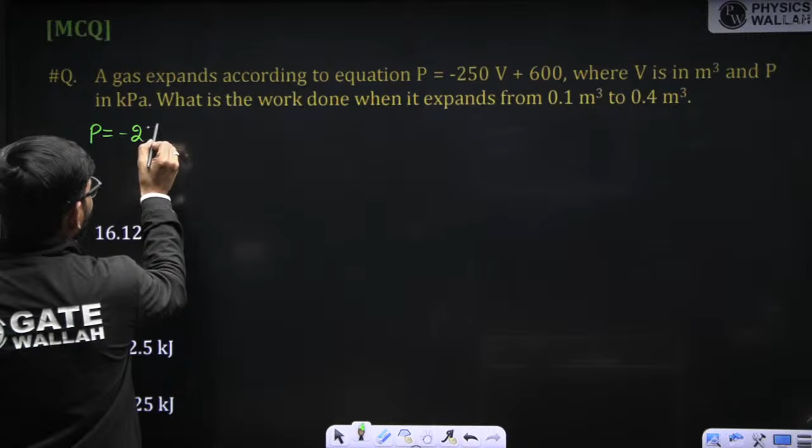The relation between pressure and volume is given: P is equal to minus 250V plus 600. This is the pressure and volume relation, where volume is in meter cube and pressure is in kilopascal. What is the work done if it expands from 0.1 meter cube to 0.4 meter cube?

0.1 meter cube to 0.4. Actually two methods are there to solve this, right? One with the help of formula. So what is the formula to get the work? W is equal to integration 1 to 2 of PdV. Yesterday we discussed this, right? This is a closed system displacement work.

Now in this one we can write 1 to 2 of minus 250V plus 600 into dV. Now if I integrate this, you will get minus 250 into (V2 square minus V1 square by 2) plus 600 into (V2 minus V1). Very simple, just integrate and put the value, you will get the answer easily.

So here I can write 250 divided by 2. How much will it come? 125. So minus 125 V2 square. What is the final volume? Final volume is 0.4. So 0.4 square minus 0.1 square.

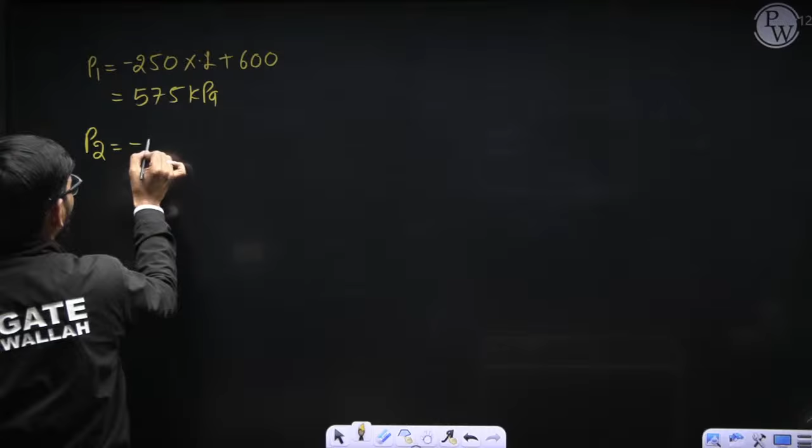So minus 250 into 0.4, this value will come 500 kilopascal. Now if I draw here the P1V1 and P2V2 points.

P1 value is 575 and V1 value is 0.1, so this is basically one point: here it is 575 kilopascal, this value is 0.1. Another point is somewhere here where pressure is reduced to 500 kilopascal and volume becomes 0.4. The pressure and volume relation is given.

Like in a straight line. It is given as a straight line because P equals A plus, like you can say Y equals mx plus C kind of equation, correct? So this is basically a straight line variation.

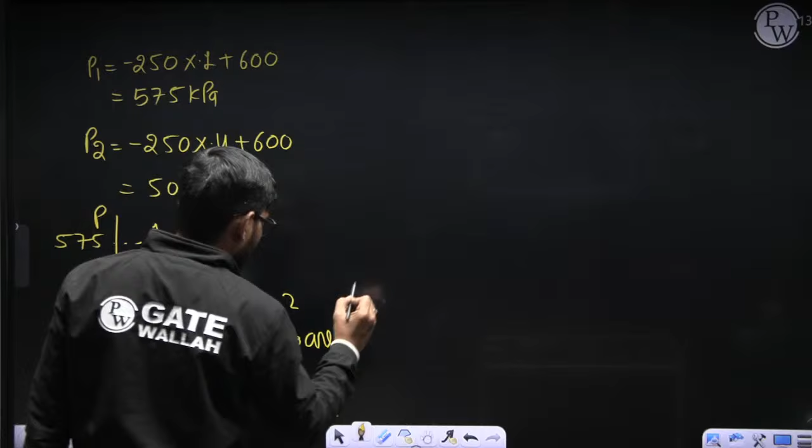Pressure and volume relation is linear. Now the work is given by the area under the curve, right? So this area, W1 to 2 can be written as area under the line. So this value will come half.

Sum of parallel lines means 575 plus 500, into this distance means 0.4 minus 0.1. This is another method, right? So from here you will get 575 plus 500 divided by 2 into 0.3, right? So you will get 161.25 kilojoule. Clear?

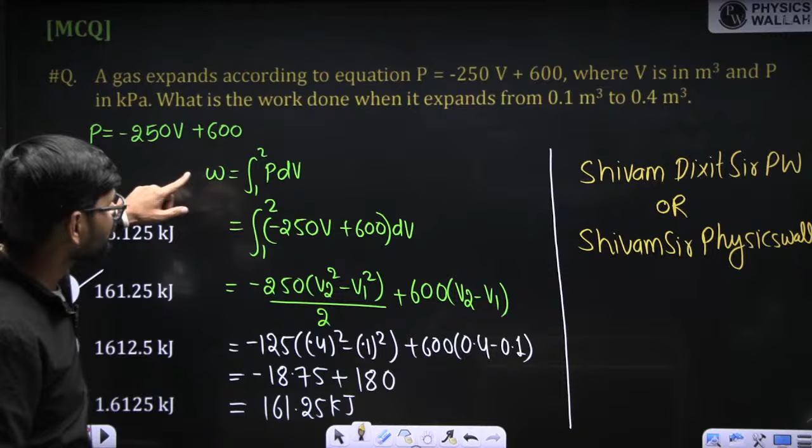Please listen here. You can solve the problem. Yesterday also I clearly mentioned that whether you can solve the problem with the help of formula or you can solve the problem with the help of area under the curve, you will get the same answer.

Okay, let's solve the next problem.

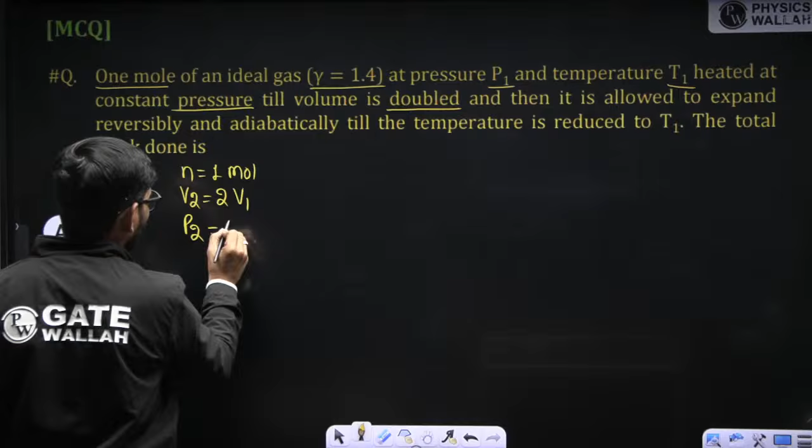Then it is allowed to expand reversible adiabatic till the temperature reduced to T1. Temperature is already T1, na? 1 mole of an ideal gas, 1.4, at pressure P1 and temperature T1, heated at constant pressure.

Okay, first we are heating at constant pressure. Acha, okay, then we are expanding. Okay fine. So basically here you can say 1 to 2 is constant pressure. Okay, I'll draw the diagram itself. PV diagram I'm going to draw.

So the first process is given that it is constant pressure heating. This is, let's say this is point 1, constant pressure heating. Then isothermal, then allowed to expand reversible adiabatic. This is reversible adiabatic. So this value is PV to the power gamma equals constant.

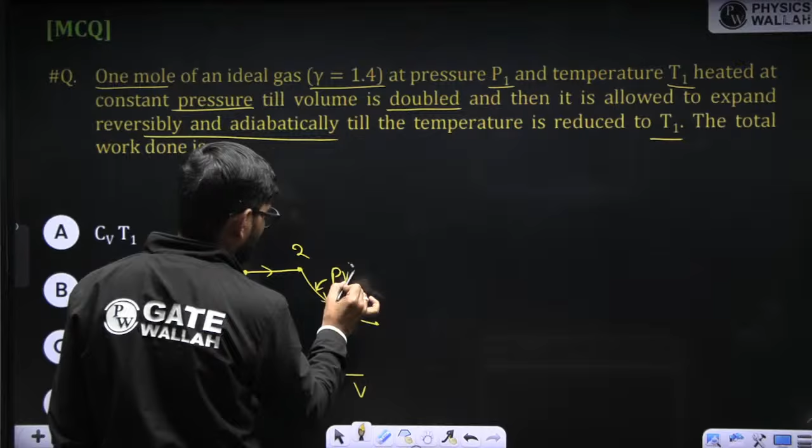Now in such a way that T3 equals T1, my dear student friends. The total work done you need to calculate. What is the total work done? So to find out total work done, please listen here carefully, right? So W total equals W1 to 2 plus W2 to 3.

Now what is W1 to 2? Please listen here carefully, this is a very good question, I would say. Why? Because here some people will get confused. They will think that, sir, final temperature is T1, so this point should be here. No, right? There will be an isothermal line like this, right? Isothermal line will be like this, right?

You are getting my point or not, right? So basically here only 2 processes are there. Point 3 temperature and point 1 temperature is same, correct? Now in this case W1 to 2 value will come P1, or we can say P1 also, right?

V2 minus V1, P1 into V2 minus V1. This is basically work done during the 1 to 2 process, correct? Then plus P2 V2 minus P3 V3 divided by gamma minus 1. Any problem here? No problem at all.

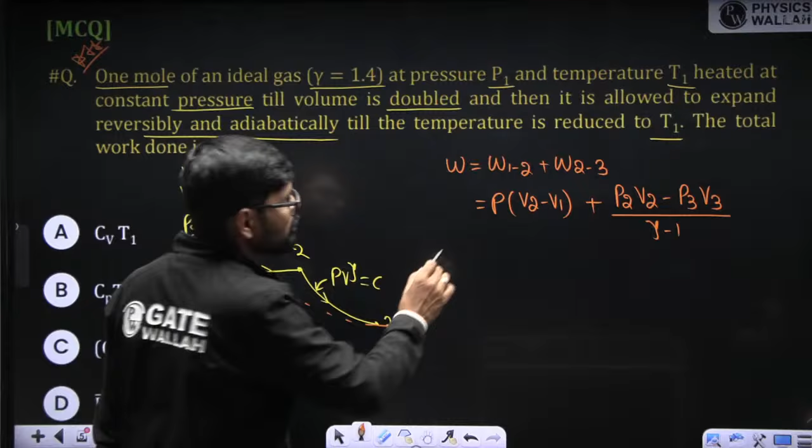Please listen here carefully. Now the answer is given in terms of temperature, so it is better to convert all these things into the form of temperature. Now here P1 is equal to P2 is equal to P, right? So you can write this like N R bar T. P2 V2, here you can write like this, P2 V2.

So P2 V2 value will come how much? Okay, I will write here P2 V2. Now you may ask, sir, why are you writing P2 V2? I am writing P2 V2 because P1 is equal to P2 is equal to P, correct? So P2 V2 minus P1 V1, here I am writing this P as P2, and here as P1, plus

P2 V2 minus P3 V3 divided by gamma minus 1. Gamma minus 1. Now put the value.

So this value will come how much? This value P2 V2 is equal to MR T2, or NR bar T, right? NR bar T2 minus NR bar T1, right? Plus NR bar T2 minus NR bar T3.

T3 is equal to T1 basically, right? T3 is equal to T1, gamma 1.4 minus. Yes.

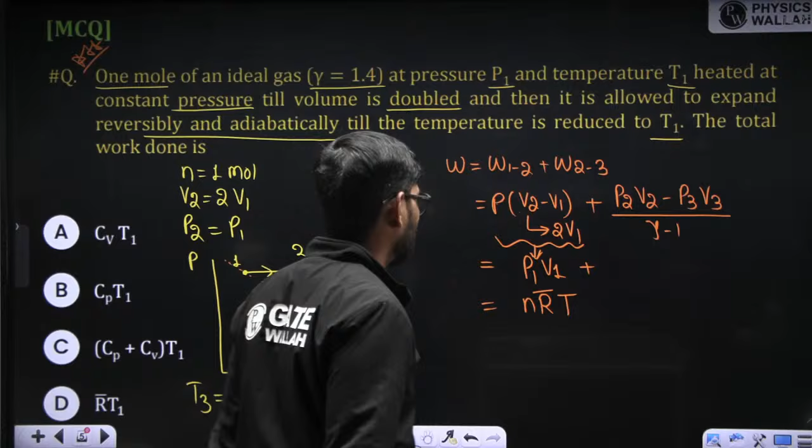And this value also can be written like this, now V2 and V3 value. Now V2 value is 2 times of V1. V2 value is 2 times of V1. This here also if you require you can write, or you can mention the MR temperature term also, no problem. Here you can write 2 times of V1 also as per the requirement.

With the help of first law also you can solve correct, TPM. That can be written as, because dq is equal to du, that is also correct. There is one another option.

There is another option, if this seems lengthy, then w is equal to, sorry, wait, I will write here w1 to 2. Easy way I am telling you. First you calculate w1 to 2. So that value will come P into V2 minus V1, because some people may confuse there.

So 2 times of V1 minus V1. So here it will come P into V1, or P1 V1. That can be written as RT1, no problem.

Now when you calculate 2 to 3, you have one option that you can apply first law, right? You can apply first law here. First law is dq 2 to 3 is equal to du 2 to 3 plus dw 2 to 3.

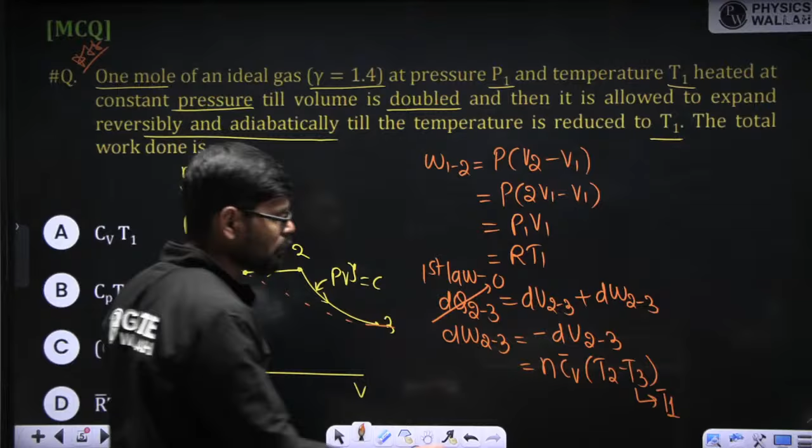Now t3 value is given as t1, right? t2 value is given, t3 value is given as t1. Only you have to replace the t2 value. Only you have to replace the value of t2.

How you will replace? For process 1 to 2, pressure is constant. So T2 by T1 is equal to V2 by V1.

So this is 2 times of V1 by V1. So this will be cancelled out. So T2 value will come 2 times of T1 also. So this can be written as 2 times of T1.

So this value will come how much? CV bar T1. CV bar T1 bar T1. In our notation bar is there, right?

Now we need to calculate total W. So W1 to 2 plus W2 to 3. This will be quite easy. Even you can put with the formula, and then formula you can convert in form of T.

Then R can be written as R. CV can be written as CP minus CV can be written as R. In that way also we can solve, no problem. R bar T1 plus CV T1, right?

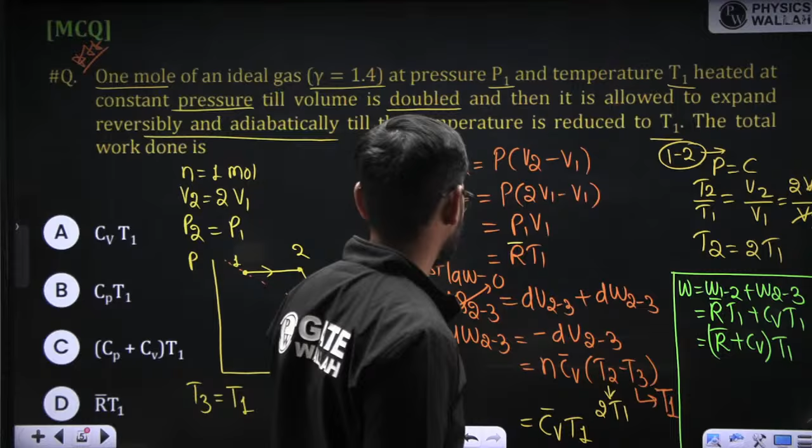So Cp minus Cv. Okay, so we know that here I can write Cp minus Cv bar is R bar. So Cp bar is equal to R bar plus Cv bar. So this can be written as Cp bar into T1.

Actually, this is written Cp bar only, right? Because yesterday also I clarified that whatever notation we are using, that does not mean that IIT people are also using the same notation. There is no guarantee on that. So don't be confused here.

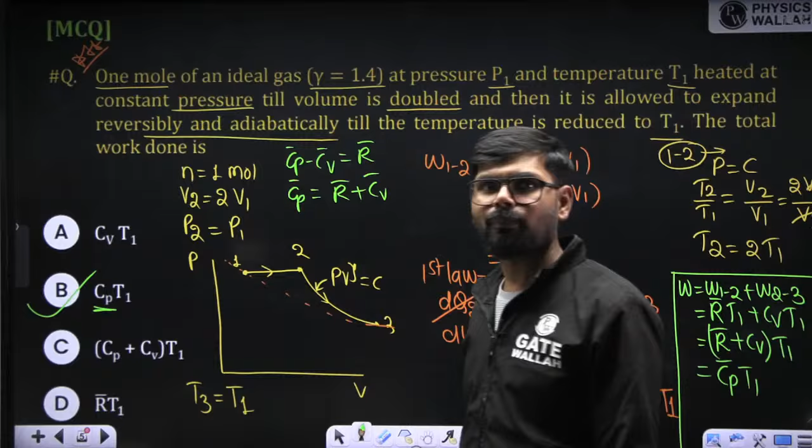See, Cp bar we are using generally when the values are given per mole. When the values are given per mole, then we are using Cp bar, right? Sorry, bar. When values are given per unit mass, then we are using direct C or whatever it may be.

Okay, next question. Everyone try to solve this problem. Yes, this is molar form of Cv, correct?

This is not a cycle problem.

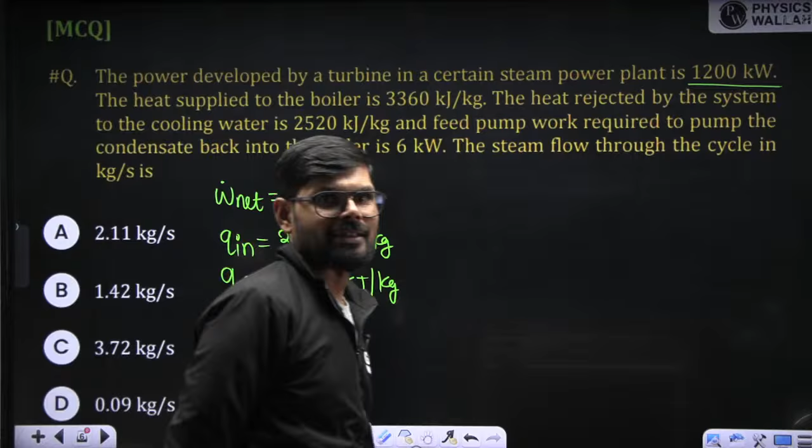Solve fast. Very good, TPM. Which option is correct? It is a very simple first law problem, bhaiya. It is a first law problem only.

It is a first law problem only, beta. This turbine power, this is WT dot. WT dot value is here. Now, so it is basically operating on a cycle. So for a cycle, we can write sigma Q is equal to sigma W.

Now, heat is added, right? So we can write Q in dot, everything I am writing in rate form. Q in dot minus QR dot is equal to WT dot minus W pump dot. Now these values are given in kilojoule per kg, so you can write M dot, M dot will take outside. So this value will come: Q in minus QR is equal to WT value 1200 minus WP value, how much? 6. So M dot value you can calculate.

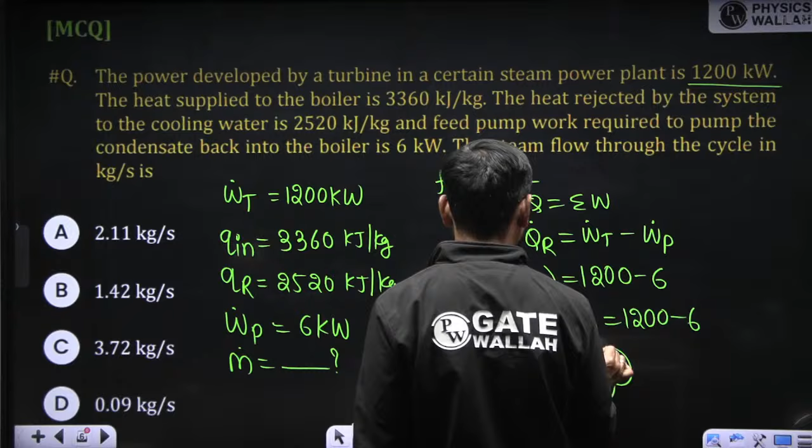Q in value is how much? 3360 minus QR value is 2520 is equal to 1200 minus 6. M dot value you can calculate, how much are you getting? 1.42 kg per second. 1.42 kg per second, right?

So shall we move to the next problem? We have 1.42. Okay, solve this problem. This is a very good problem, and even we have did in the class also, if you recall. We have already solved this problem in the class also.

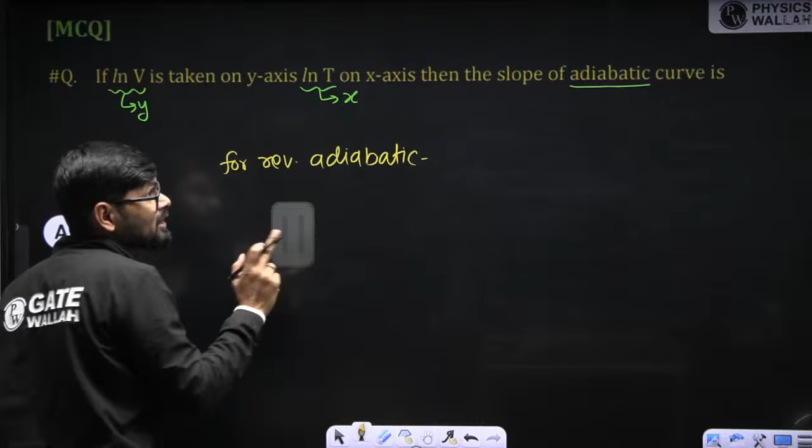And we have to find out for adiabatic curve. Now, for adiabatic curve, what is the equation, beta? For reversible adiabatic, PV to the power, or use T and V relation. Yesterday I gave 3 relations, if you recall. So TV to the power gamma minus 1 is equal to constant.

Now take log both the sides. Right? So here you will get ln TV to the power gamma minus 1 is equal to ln of constant. Now here, ln A into B is ln A plus ln B. So ln T plus ln V to the power gamma minus 1 is equal to ln C.

Now this can be written using log properties, which you already know. So gamma minus 1 will come to this side: ln V is equal to ln C. Basically, we want to write it in terms of y is equal to mx plus c. So y means ln V, I want it on this side only. So I can write: gamma minus 1 ln V is equal to minus ln T plus ln C.

Right? Now what I am going to do is divide by gamma minus 1. So ln V is equal to minus 1 by gamma minus 1 ln T. Then it will become some other constant, let's say C. ln C by gamma minus 1 is also a constant. That's it, very simple. So this is C only.

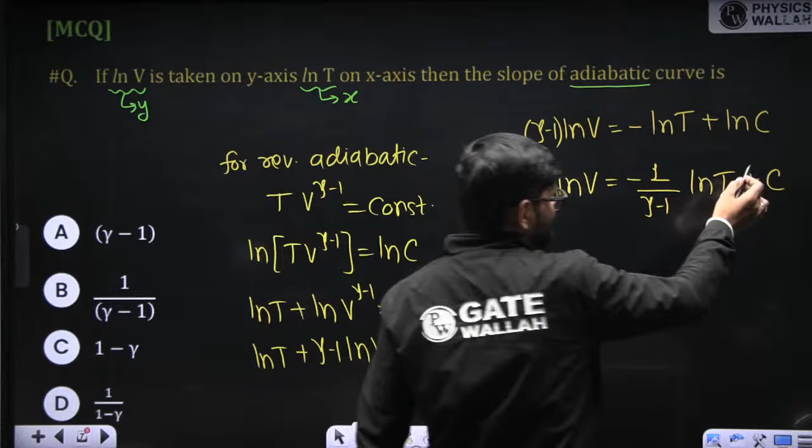Now this can be written as ln V is equal to 1 by 1 minus gamma, ln T, plus C. I already told you this is basically represented as Y, and this is represented as X. So it is Y is equal to, compare with Y is equal to mx plus c. So m value will come how much? 1 by 1 minus gamma. This is a slope. Solve.

Solve fast, Babu, fast. Very good, Adarsh Singh, Rosni, Vishal, Vibhu, Mukul Srivastav, Mac. Very good. All the superstars are here.

Shall we move on to the next problem? Okay, let's move to the next problem. Everyone please solve this problem here.

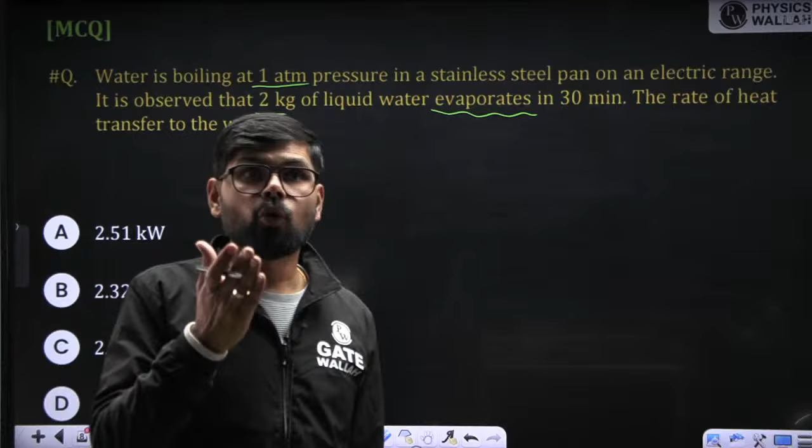Now it is given that water is boiled at 1 atmospheric pressure in a stainless steel pan with an electric range, meaning an electric heater kind of setup. It is observed that 2 kg of liquid evaporates. Please listen and try to understand: when they say evaporation, only the heat required for evaporation needs to be considered.

In 30 minutes, we need the rate of heat transfer. Please try to understand how much amount of heat is required to evaporate 2 kg of liquid.

So Q required is basically M into L. This is the total heat required. Total heat required is M into L. Like if you want to evaporate 2 kg of water, then M into L.

Now the L value, yesterday I gave you 2256. You need not remember all the values of latent heat, since latent heat values vary with respect to pressure as well as temperature. So here we can write 2256 approximately. This is the latent heat at 1 atmospheric pressure.

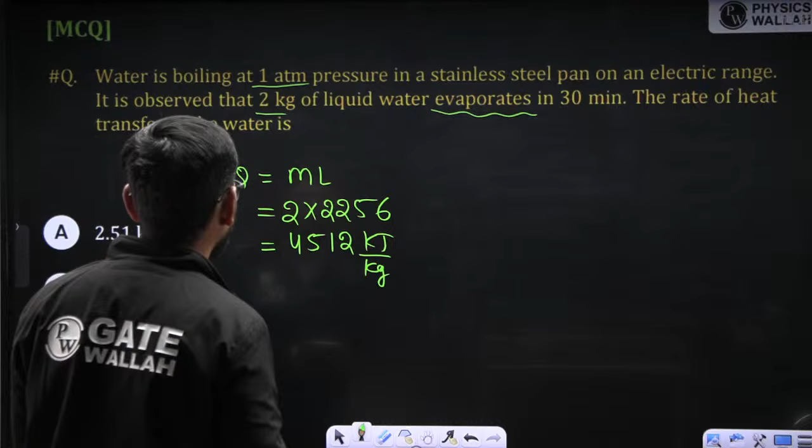So this value will come how much? 2256 into 2, so this value will come 4512 kilojoule.

Now, but actually we are not interested in Q, we are interested in Q dot. So Q dot value will come how much? Q dot value will come Q by time, my dear student friends. So this value will come 4512 divided by time.

Time is 30 minutes, 30 into 60, we are writing it in seconds. So this is divided by 30 into 60. So this value will come 2.51 kilowatt.

Very simple problem, very simple but highly conceptual. Very simple and highly conceptual problems. Very good.

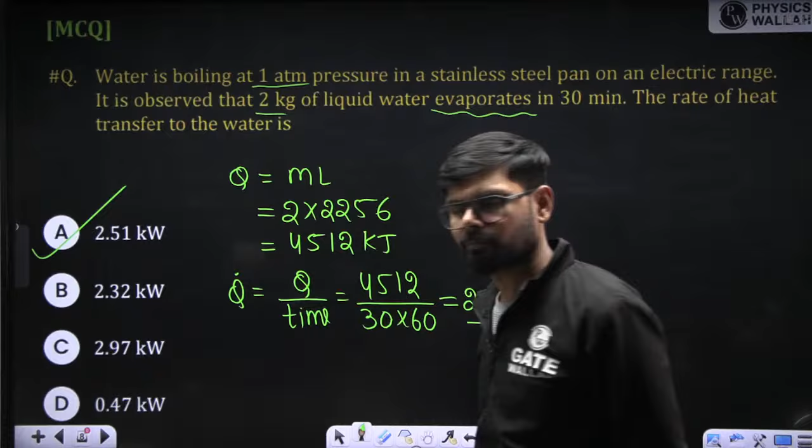Shall we move on to the next problem? Sure, okay. Solve this problem. Everyone try to solve this problem.

Here it is given that a Carnot engine having efficiency 0.5 is driving a refrigerator which has a COP of 5. So it is like we have one heat engine that is taking Q1 amount of heat and rejecting Q2 amount of heat at lower temperature. Then whatever work it is producing, that work is going into a refrigerator. That refrigerator, let's say, is taking heat from a lower temperature, that is Q3, and rejecting Q4 to the higher temperature. This kind of system is there.

Now here two conditions are basically given. In such type of problem, I have already told you, you have to write all Q in terms of Q1. Basically what they are asking is the ratio of the heat rejected to the ambient to the energy absorbed.

So ambient, how much heat? See, this is also ambient, this is also ambient. Let's say this is taking heat at a T1 temperature, but it is rejecting at atmospheric temperature, T ambient. It is taking heat from the place where we have to cool, but this we are also rejecting to T naught. I will write T naught here, and T naught here as well.

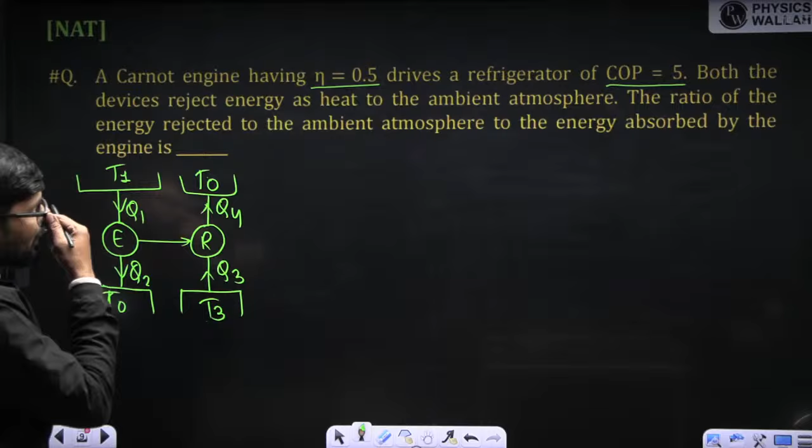So basically what we need to find out is Q4 plus Q2 by Q1. This is basically what we need to find out: the energy rejected to ambient divided by the energy absorbed.

Clear? So how we will proceed? I told you earlier also, in such type of problems, you only have to focus on how we can convert all Q in terms of Q1. For example, the efficiency given is 0.5, that is 1 minus Q2 by Q1. So Q2 value will be 0.5 Q1.

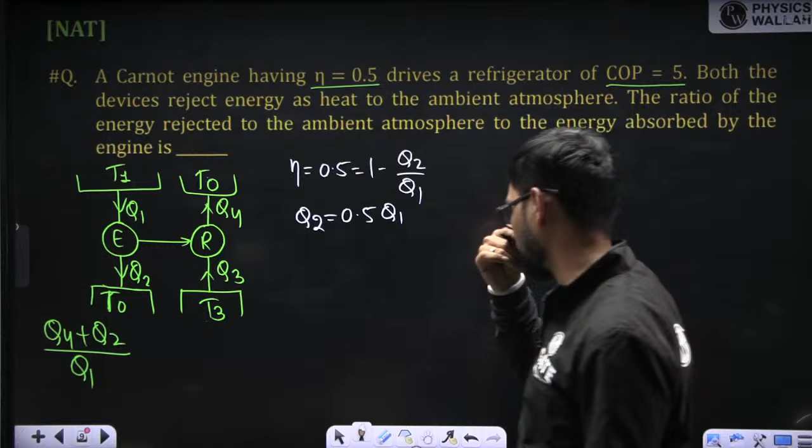Now come to the other case, that is COP which is also given. Now what is the COP of a refrigerator? COP of a refrigerator is given as 5.

That is nothing but equals to Q3 by Q4 minus Q3. Now one more thing I would like to share here: Q4 minus Q3 can be written as Q1 minus Q2, because whatever work is produced by the engine, the same work is going to be consumed by the refrigerator.

So now I can write, 5 is equal to Q3 by Q1 minus Q2. So Q1 is Q1, Q2 is 0.5 Q1, so this value will come 0.5. So Q3 value will come 2.5 Q1.

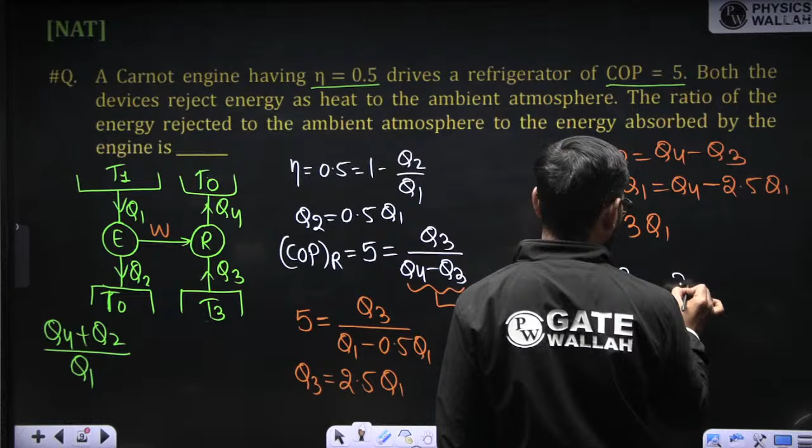Now we have to find out Q4 value. So Q1 minus Q2 is equal to Q4 minus Q3. So Q1 minus 0.5 Q1 is equal to Q4 minus 2.5 Q1. So Q4 value will come 3 Q1. Now we have to find out Q4 plus Q2 by Q1. What is Q4? 3 Q1 plus 0.5 Q1, divided by Q1. This value will come 3.5. This is the answer. These are very, very good problems.

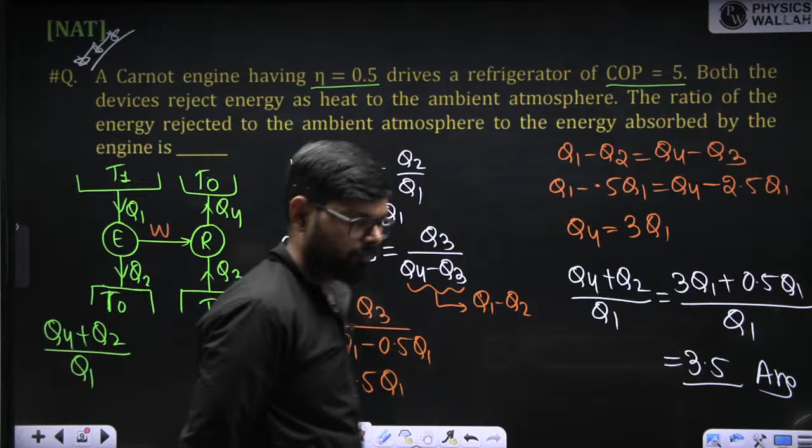These are very, very good problems. In this session, you can see that these questions are very good, right? There are very good chances that these type of questions may ask in the exam. So Super 20 series is going on. We are solving the problems. So everyone come fast and we'll continue. Very good, very good, very good. Next problem, solve next problem.

Similar kind of problem, because engine is driving the refrigerator. Sir, why are you taking same work in engine and refrigerator? Yes, TPM is giving the correct answer, because the engine is going to drive the refrigerator, so whatever work is produced by the engine, that is consumed by the refrigerator. Very simple.

The second law efficiency. What is second law efficiency? The second law efficiency is basically actual efficiency by reversible efficiency. And this is second law efficiency given as 0.6, that equals actual efficiency 0.36. Now what is reversible efficiency? 1 minus TL by TH.

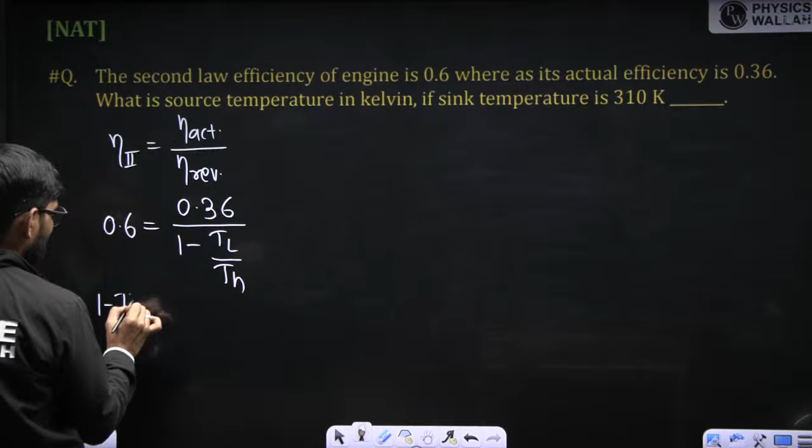So you can write 1 minus TL by TH. TL by TH value is how much? TL value is given as 310 Kelvin. So what is the value of TH? You need to find out TH value, solve fast. So I can write 0.36 divided by 0.6 equals 1 minus TL by TH. This will go this side, this will go this side. So 1 minus 3 by 5. TL by TH value is 2 by 5.

So 310 divided by... 775. Yes, 775 Kelvin. Very good.

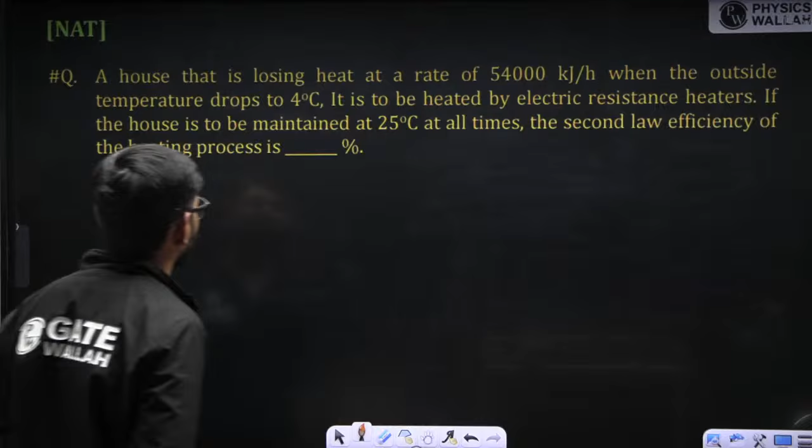Now, in this problem, if you see, a house is losing heat at the rate of 54,000 when outside temperature drops to 4 degrees centigrade. It is heated by an electric resistance heater if the house is maintained at 25 degree temperature all the time. The second law efficiency you need to find out. First try to find out how much reversible work input is required.

See, suppose you have one house, TPM, and it is maintained at 25 degrees centigrade, but outside temperature is 4 degrees. That's why it is rejecting heat at the rate of 54,000 kilojoule per hour. Write in kilojoule only, no problem, kilojoule per hour only, no problem. So if you want to maintain this house at the same temperature, the same amount of heat you need to supply.

Same amount of heat you need to supply to maintain this temperature. Otherwise you will not be able to maintain it. If you supply less heat, the temperature will drop. If you supply more heat, the temperature will increase. If you want to maintain the same temperature, exactly the same amount of heat you need to supply.

Assume that I am supplying this with a heat pump. Sir, why are you considering a heat pump? Because I want to calculate W reversible. Very good. So this is taking heat from 4 degrees centigrade and W reversible work. Just assume that you have a reversible heat pump and you are using it like this.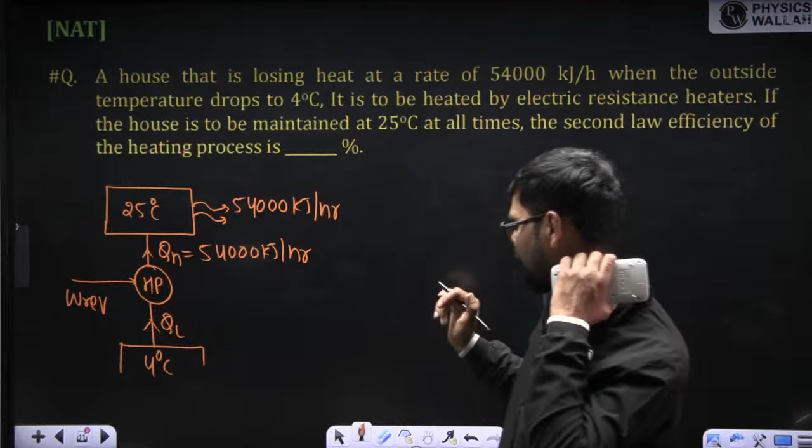So what is COP of this heat pump? COP of this heat pump is equal to TH by TH minus TL. TH means 273 plus 25, that is 298, divided by 298 minus 4.

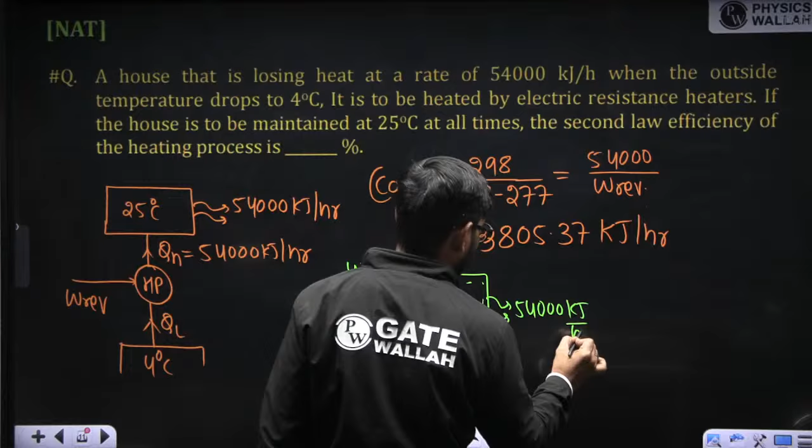So sigma q is equal to sigma w, or dq is equal to du plus dw. Du value will be 0 because temperature is maintained constant. So W actual value will come 54,000 kilojoule per hour. So actually you need to supply this much amount of heat, whereas reversibly you can supply this much amount of heat.

So what is the correct answer?

Now we have to find out the second law efficiency. Second law efficiency is W reversible by W actual. So this value will come to 3805.37 divided by 54,000, which gives 0.0705, or you can say 7.05%.

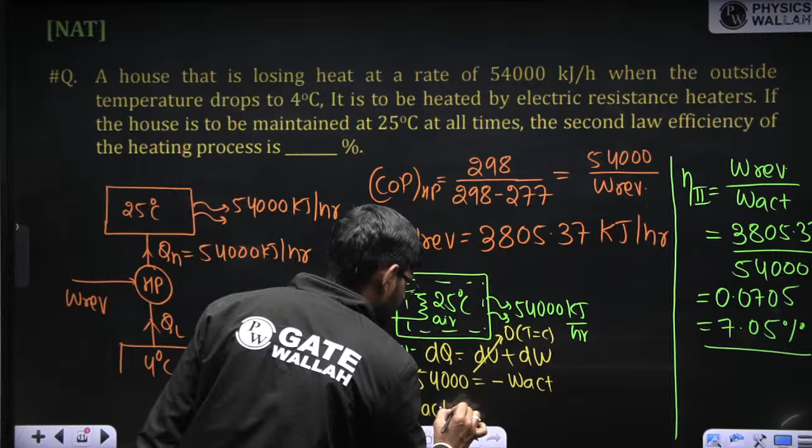So W actual one more time, please try to understand. Here basically what we have, air is there, so in this case I can apply first law: dq is equal to du plus dw. Now du value will be 0 because temperature is constant, 25 degrees is maintained. That's why du value becomes 0. dq value is minus 54,000, since it is rejecting, and W value is minus W actual. So W actual value will come to 54,000 kilojoule per hour. Is it clear?

Who is asking this question? Raju Mahanto. Raju Mahanto, is it clear?

Actually, I am not able to see the comment. The comment I am able to answer, I am able to see, but the name I cannot see in the TV because the TV is a little bit far away. I have to zoom it somehow.

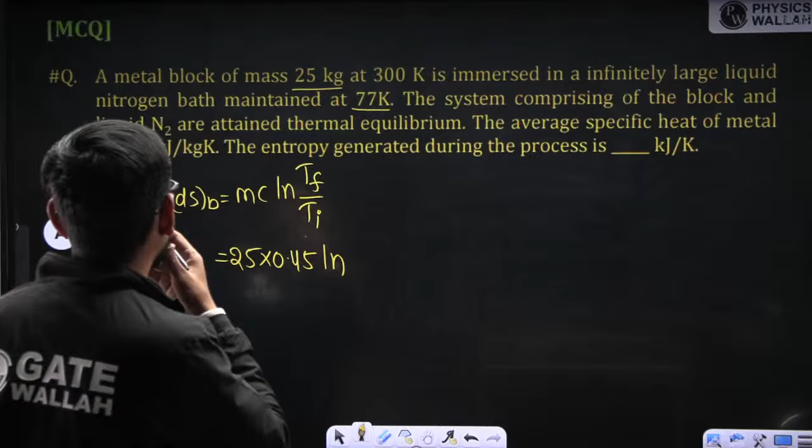So what is the m value? m is given as 25 kg, C value is 0.45, ln T final. Final temperature is how much? Final temperature of the block will be 77 Kelvin, initial temperature is 300 Kelvin.

So this value you will get, that is ds of system, ds of block: 77 divided by 300, ln of the answer, into 0.45, into 25. So this value is minus 15.2993, I can write it as 15.3, and the unit will come as Kilojoule per Kelvin.

Now you need to check how much this entropy change of the block is. Now you need to check how much amount of heat is going to be rejected by the block.

So Q block equals mc dt, right? Magnitude only I am calculating here, m value is 25 into 0.45, into 300 minus 77. I am calculating the heat rejected by the block. So how much heat is rejected by the block? 300 minus 77 into 25 into 0.45, so this value will come...

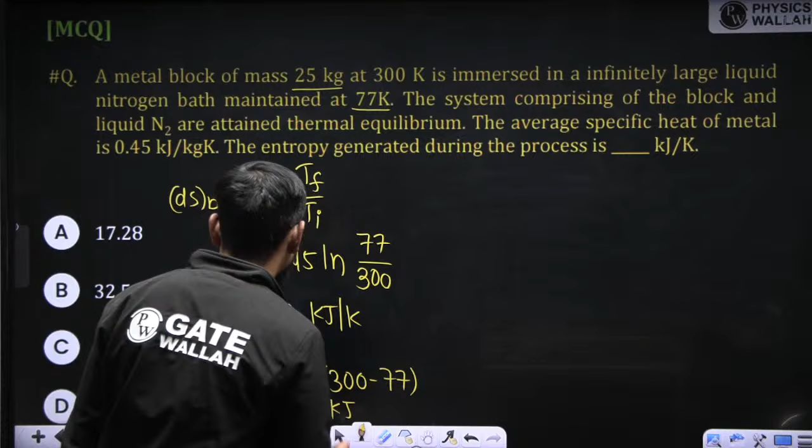Now we'll calculate ds of nitrogen bath. So whatever heat is rejected by the metal block, that is going to be absorbed by the nitrogen bath. So basically its value will come as Q by T.

So Q value is 2508.75 divided by temperature, which is 77. Correct, Q by T plus. So this value will come out in plus.

That is 32.581168 kilojoule per Kelvin. Now we have to calculate delta S generation. Delta S generation is nothing but ds of universe, which is ds of block plus ds of nitrogen. So this value will come minus 15.3 plus 32.58, so 17.28.

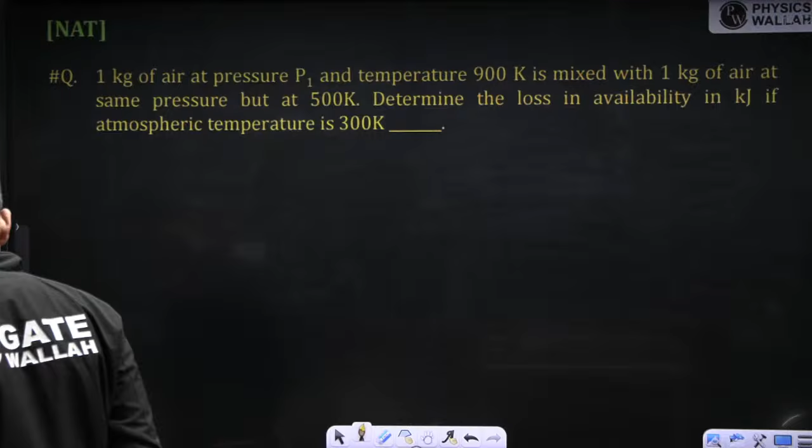Shall we move to the next problem? Okay, now here we have the next problem with you. 1 kg of air at pressure P1 and temperature 900 Kelvin mixed with 1 kg of air at same pressure but 500 Kelvin. Determine the loss of availability.

Gouy-Stodola theorem: T naught into ds of universe.

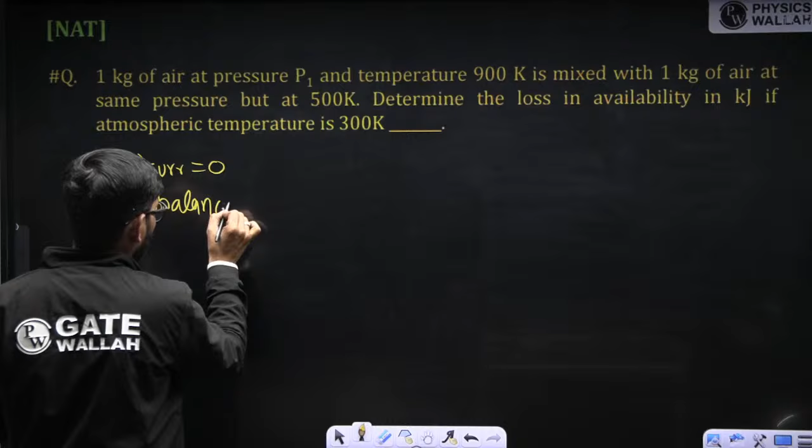So energy balance you apply. Energy balance: heat lost by hot body, even same whether you have hot body, hot air, is equal to heat gain by cooled air.

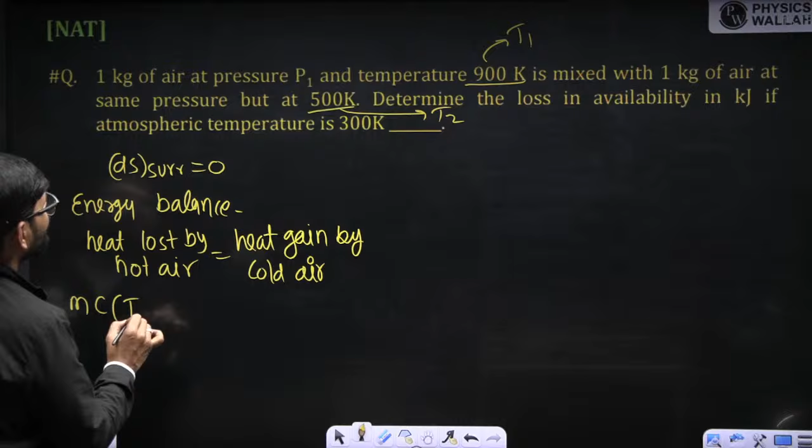Now this air I am considering as 1, this air I am considering as 2, correct? Now, should I directly write T final? T final value will come as T1 plus T2 by 2. So mass mc of air, and dt, T heat lost means T1 minus T final is equal to heat gain by m. Same m is there, same c is there, both have 1 kg, same air is there. So T final minus T2. So T final value will come T1 plus T2 by 2.

So this value will come 900 plus 500, divided by 2, that is 700.

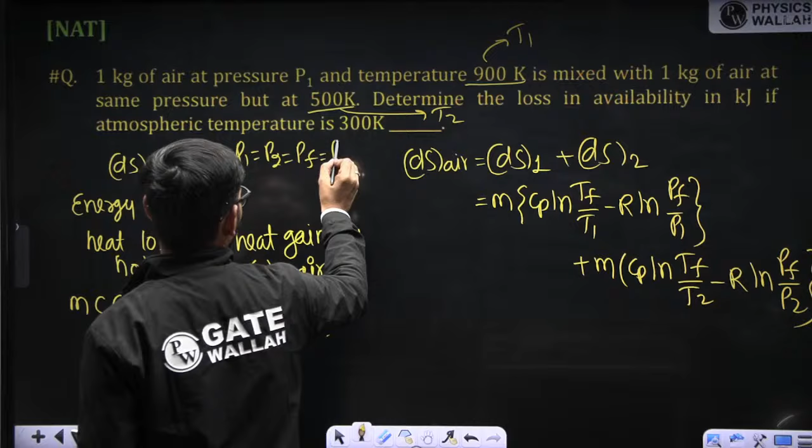Now ds of air I am writing like this: ds of air equals ds of first air plus ds of second air. First air formula will come m, Cp ln T final by T1 minus R ln P final by P1, plus m into Cp ln T final by T2 minus R ln P final by P2. Now here P1 is equal to P2 is equal to P final. All are same, so if all are same, here pressure variation, this value will become 0, this value will also become 0, because only mixing is going to take place.

M value is 1 kg only, Cp will take outside. So M value is 1 kg, Cp value also consider 1 only or 1.005, whatever you want, ln. T final is 700. So 700 by 900, mc ln T final by T initial plus ln T final by T2. So what is the value basically? 700 by 900 ln of answer plus ln 700 divided by that, so this value will go into 1.005. So this value will come 0.08585 kilojoule per Kelvin.

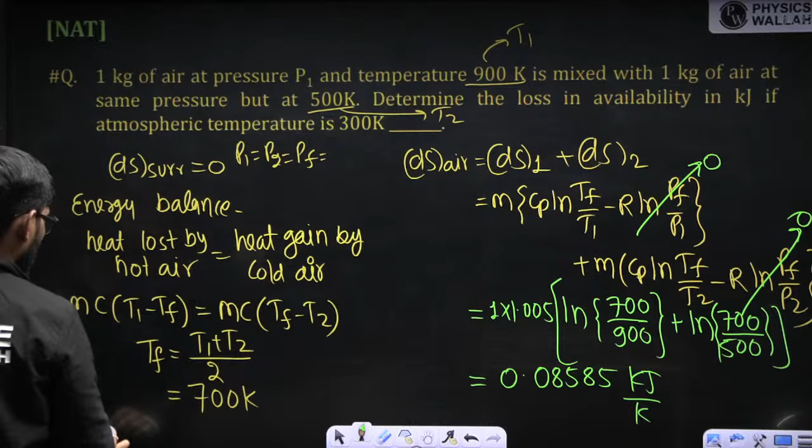Irreversibility is equal to T naught into ds of universe. T naught value is given as 300. So this value is 300 into 0.08585, to 300. So this value will come 25.67 kilojoule.

Very good, that also you can do. Loss is equal to available energy, that also you can do, no problem. Whatever available energy change will be there, that also can be considered as a loss only. So that also you can consider, but actually I did like this so that uniformity will be there. By that equation you cannot always solve. Answer you will get same, but generally I always recommend students, whenever loss is asked, always use the Gouy-Stodola theorem. It will be a little bit lengthy, I understand this, but at the same time you have clarity, you will not get confused.

Okay, next problem. Right, next problem. Everyone solve this problem: the mass flow rate of air in a compressor. Very good, this is also an easy problem only.

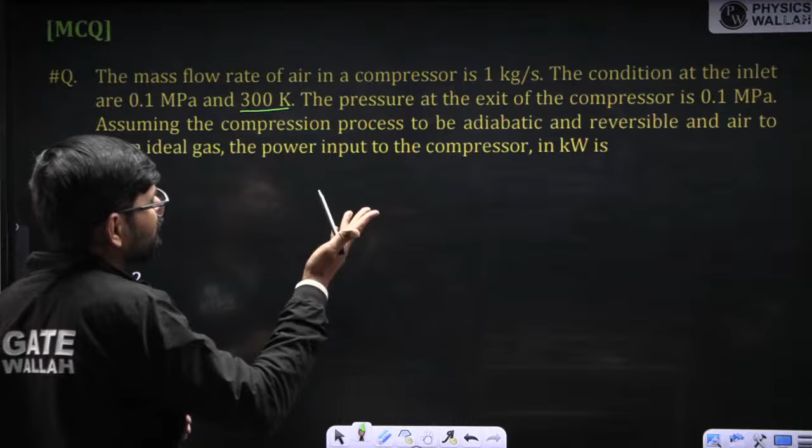Okay, solve another problem. I think there is some mistake - it may be 1 megapascal. Try to solve with 1 megapascal and check whether the answer is matching or not. I am not able to find the question, so I think by mistake they have written 0.1 megapascal here. Just take 1 megapascal and then find the answer.

Okay, so now I am also solving along with you. Let's see, it is a reversible adiabatic. If it is reversible adiabatic, then T2 by T1 is equal to P2 by P1 to the power gamma minus 1 by gamma.

Okay, so T2 value we need to find out. T1 value is 300 Kelvin, P2 value is 1 megapascal, P1 value is 0.1 megapascal. Gamma value, since air is there, 1.4 minus 1 by 1.4. From here you will get T2 value in Kelvin. So this value will come 0.4 divided by 1.4.

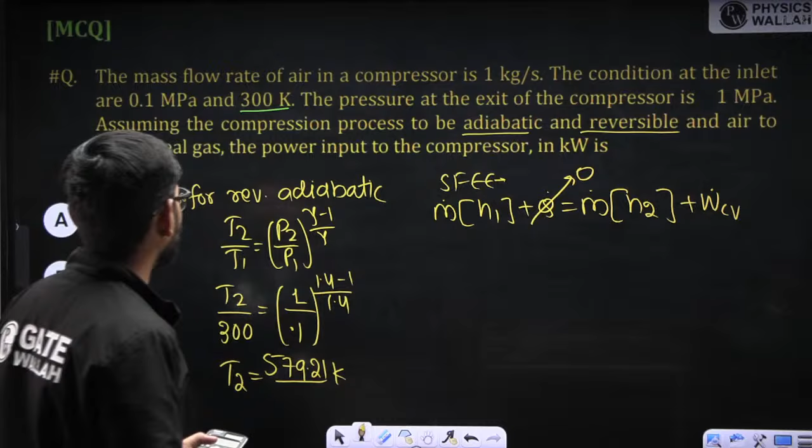Now W value we need to find out. So what is the formula? SFEE, steady flow energy equation: m dot into H1, neglecting kinetic and potential energy since nothing is mentioned, plus Q dot is equal to m dot into H2 plus W control volume dot. Now this value we take as 0 because it is adiabatic, and for the adiabatic reversible case with air as ideal gas, this is power input to the compressor, so this value is going to be negative. So I can take it to this side: W compressor dot is equal to m dot into H2 minus H1. H2 minus H1 can be written as Cp dt, so Cp T2 minus T1.

M dot value is given as 1 kg per second. So 1 into 1.005 into T2 value 579.21 minus 300 - this value will come, minus 300 into 1.005, this value 280, approximately 280 kilowatt.

So I think we were correct - we guessed that it is 1 megapascal and it was correct.

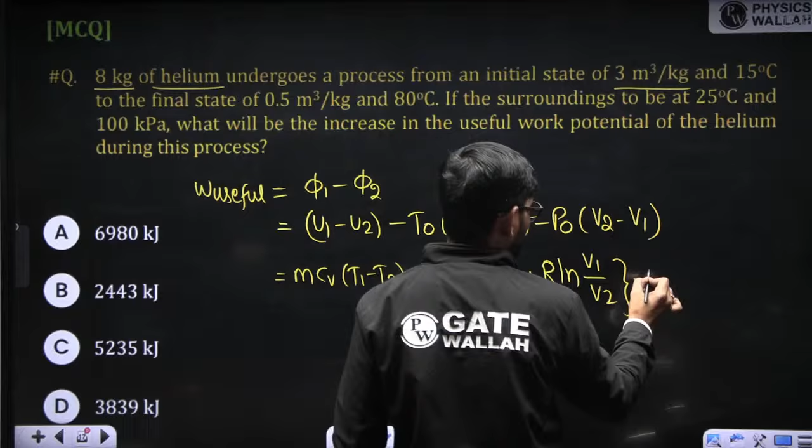Now helium is a gas. So for that, what is the change in entropy? S1 minus S2. So this value will come Cp ln T1 by T2 minus R ln P1 by P2. Or actually, we can use... pressure is given, final pressure is not given. Okay, final pressure is not given. So better to use another formula, the V wala formula, right? So here you can write Cv ln T1 by T2 minus R plus R ln V1 by V2 minus P naught into, this is given per kg na, this is per kg, so M into V2 minus V1.

Now just put the values. Just put the values, you will get the answer. Just put the values. Arey, this is the useful work I told you yesterday also, bhai. This is the useful work I told you yesterday also. So this value will come 8 into helium.

What is the Cv value of helium? Is it given? No, not given. Right, Cv value of helium, right? So if you recall, shall I write in another slide? Properties of helium.

What is? Oh, Siri connected. Arey Siri, I am not talking to you, I was trying to find the value of... Okay. So what I'm trying to say...

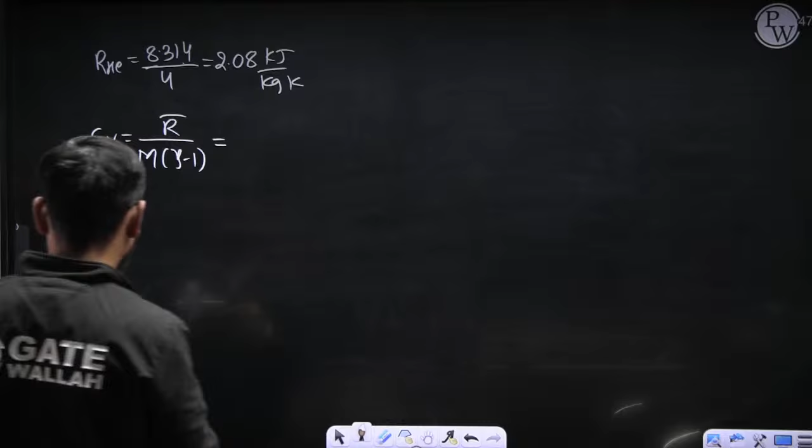Cv value. Okay. So R of helium is 8.314 divided by 4. So 2.08 kilojoule per kg Kelvin. Now Cv value is equal to R bar by M into gamma minus 1, right? So this value will come R bar, 8.314 divided by 4, divided by 0.67. So this value will come 3.102 kilojoule per kg Kelvin. If Cp required somewhere, I don't know.

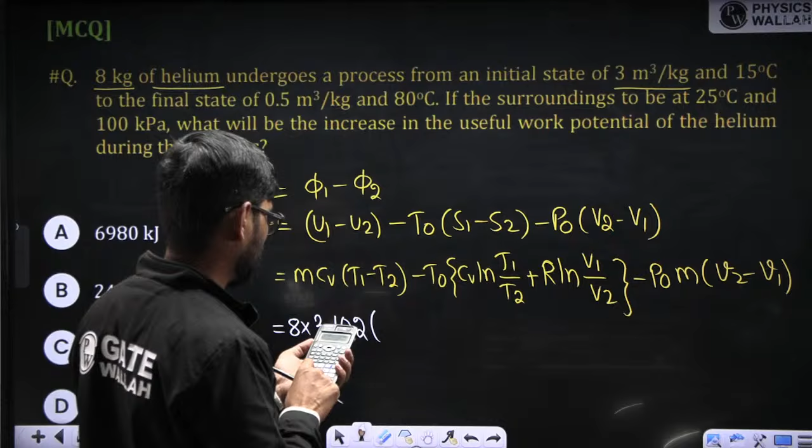Now put the value here. So 8 into CV value is how much? CV value is 3.102. So 3.102 into T1. T1 value is how much given? 15 degrees centigrade, or we write in Kelvin actually, because anyhow we have to convert 15. So 288 minus 80, that gives 353.

Actually, it is increasing now. So phi 2 minus phi 1 we need to calculate, by the way. It is better to calculate phi 2 minus phi 1, because then it will directly come as increased value. Here I am calculating phi 1 minus phi 2, so we are basically calculating the decrease in the amount of labor, useful work that we are getting. This value may come negative, but final answer you have to write in that only, right? Minus T naught.

T naught value is 273 plus 25, that is 298 into 3.102 ln of 288 by 353, plus 2.08 ln. V1 value is how much? 3 by 0.5.

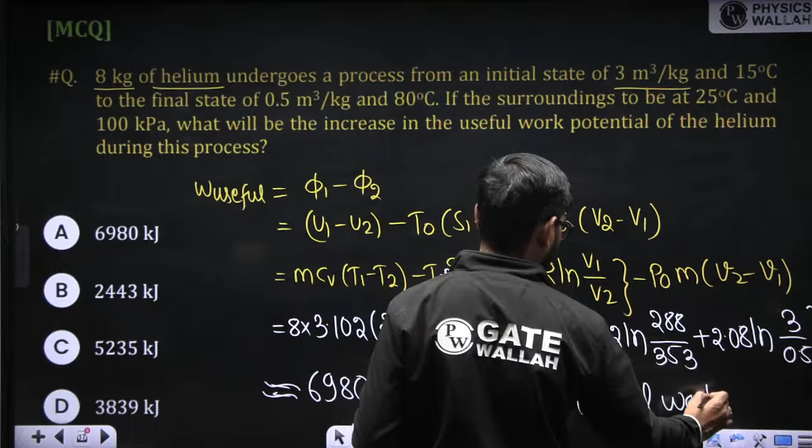Please calculate and tell me whether you got this answer or not. Everyone, please calculate, because if this type of question comes, it is going to take too much time. It may take a little bit more time, so be ready for fast calculations.

A aayega sir. Yes, very good. Good afternoon, very good afternoon, Mr. Rudra.

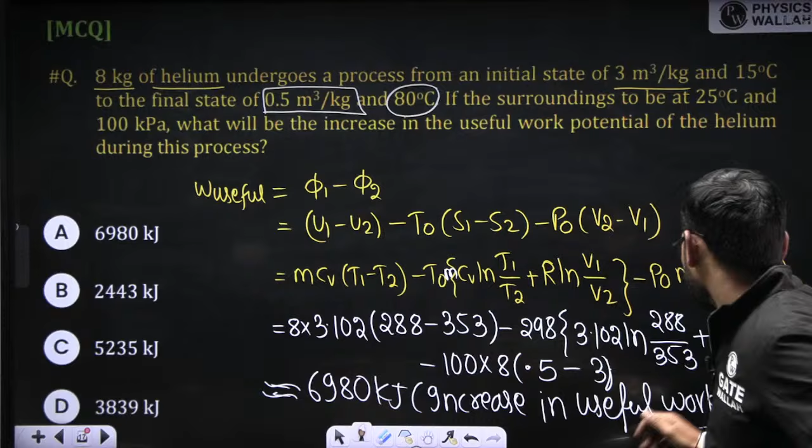Sir, how was V2 value taken as 0.5? See, this is given, this is the final state, final temperature. See, always remember, if you are considering what about the surrounding - it is a surrounding process. So as much as the system expands, the surrounding will compress that much, right? You are getting my point? So even though it is surrounding work, you need to consider system volume change only, because the amount the system increases its volume, the same volume is going to be decreased by the surrounding. Am I clear here? Shall I move?

Is it clear, everyone? Okay, please calculate. You will get A as the answer. Okay.

Okay, this question you solve. Now here it is given that 1 kg of mass iron at 1200 Kelvin is allowed to cool to 400 Kelvin, environment is at 300 Kelvin. The specific heat is 0.5. So first you see, irreversibility is very easy. Irreversibility is T0 into ds of universe.

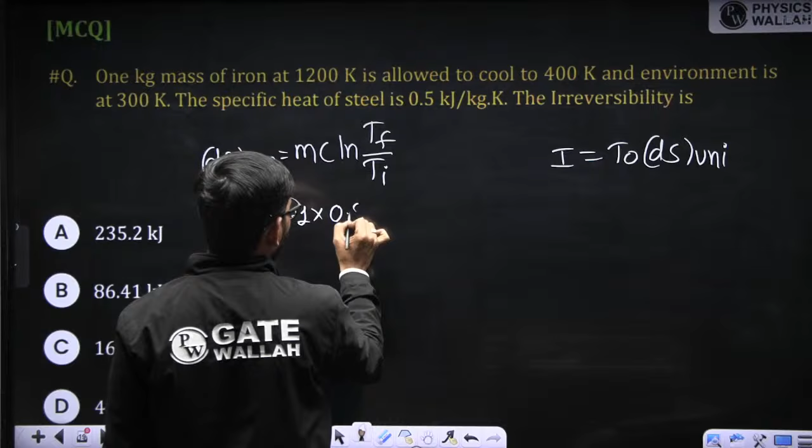That's it. So ds of universe is ds of block first. So ds of iron is how much? That is MC ln of T final by T initial, right? So M value is how much? M value is 1 kg into C value 0.5 ln T final. T final value is 400 by 1200.

Then this value will come how much? 400 by 1200, ln of this answer into 0.5. So this is 0.05... 0.05493 kilojoule per Kelvin. This is ds of iron, right?

Now calculate ds of... first calculate dq of iron. Q of iron means amount of heat rejected by the iron. Rejected magnitude I am calculating. The amount of heat rejected by the iron, that is mc into T1 minus T2. Why I am writing T1 minus T2? Because I am calculating the amount rejected: 1 into 0.5 into 1200 minus 400.

So this value will come 1200 minus 400, which is 800 into... this value will come 400 kilojoule. So this much amount of heat is going to the surrounding.

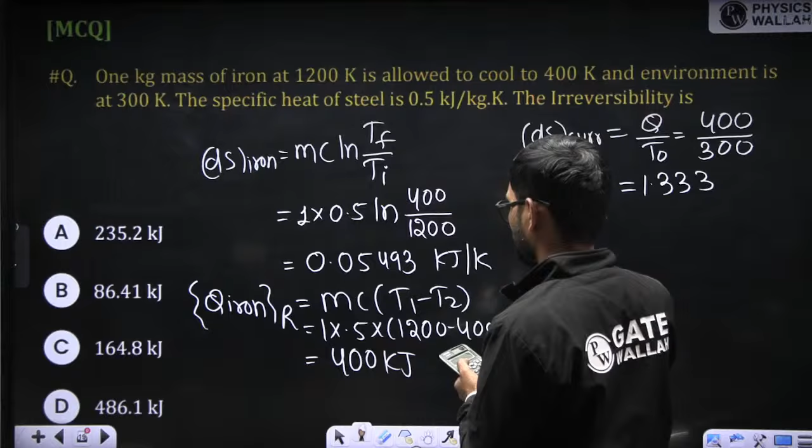So what is ds of surrounding? ds of surrounding will come Q by T naught. Q value is 400 by 300, so this value will come 400 by 300, that is 1.3333, right? So ds of universe value will come, this value is positive or negative? This value is negative, I hope so, right? This value will come negative, na?

This value I think is negative. Let me cross check one more time. 400 divided by 1200, ln of this, answer into 0.5. Oh, I wrote this wrong.

Minus 0.549, okay. So ds of surrounding, so ds of universe value will come how much? ds of universe value will come this plus 1.333, so this value will come 0.7837 kilojoule per Kelvin. We have to find out irreversibility.

Irreversibility is T naught into ds of universe, that is into 300. 235. A is going to be the correct answer.

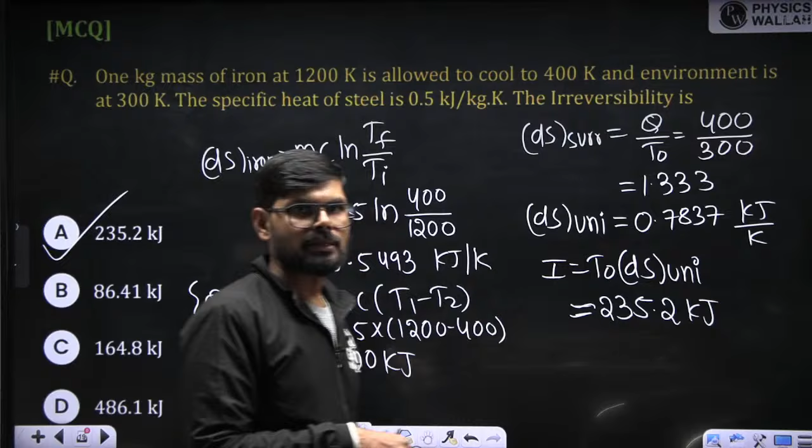Sir, anyone who started studying in December, just basics, what would you suggest? But the condition is he is repeating it. So I'll suggest you only consider 4 subjects. If someone has not studied well up to now, only 4 subjects I will recommend. First one is math, then maths again, aptitude, and any 2 technical subjects, whatever your most favorite subject. Just try to clear the GATE, try to get 30-40 marks, and then prepare for next year.

Okay, solve this. The specific volume of steam after expansion in the turbine is, after expansion the specific volume means it is V2.

Basically V2. The specific volume of steam after expansion in the turbine, V2, at this pressure, and the saturated liquid and vapor specific volume. At this pressure, the saturated liquid and vapor. So VF value is given as 0.001 meter cube per kg and VG value is 15.25 meter cube per kg.

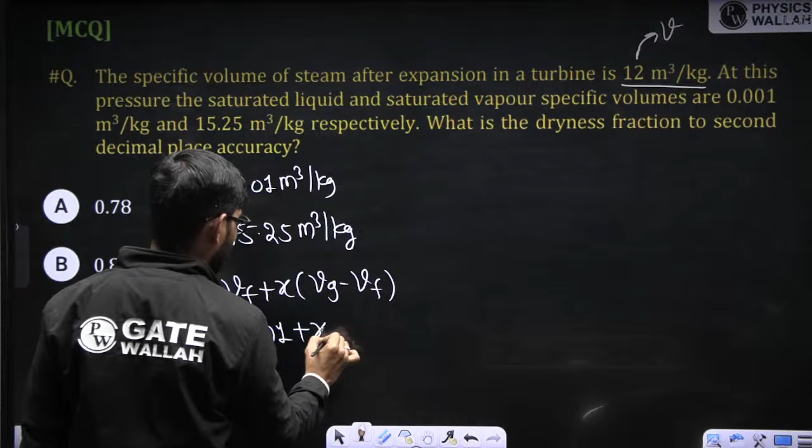Now this value is given as how much? 12. This value, 12, is equal to VF. VF value is 0.001 plus X times of VG minus VF, that is 15.25 minus 0.001.

So calculate X value from here. I hope this is only what they are asking. Even if you calculate approximately, you will get the same: 12 minus 0.001 divided by this value will come 0.7868 like that. A is going to be correct.

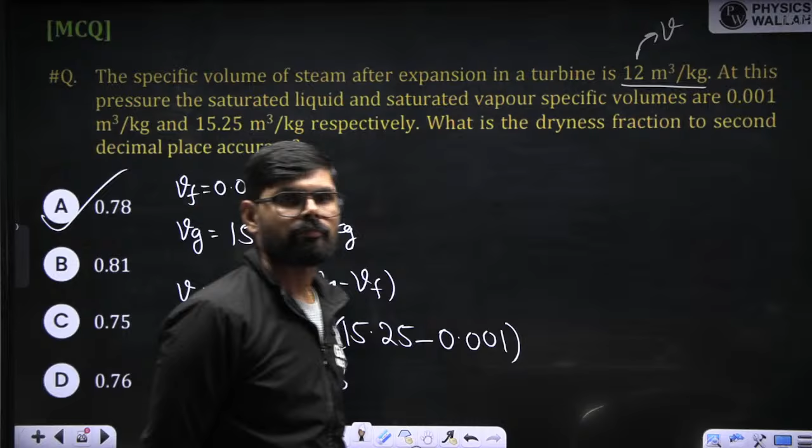Done? Are you done, Pravalika? Are you done?

Okay, let's solve the next problem. Oh wow, beautiful problem, little bit seems lengthy but beautiful. Solve this problem, everyone. Here it is given that a mass of wet steam at a temperature of 165.

A mass of wet steam at temperature 165 degrees centigrade is expanded at constant quality. So actually quality is not going to change, meaning X is equal to constant 0.8, to the 3 bar, so it is coming to 3 bar. Find the enthalpy change during the expansion process.

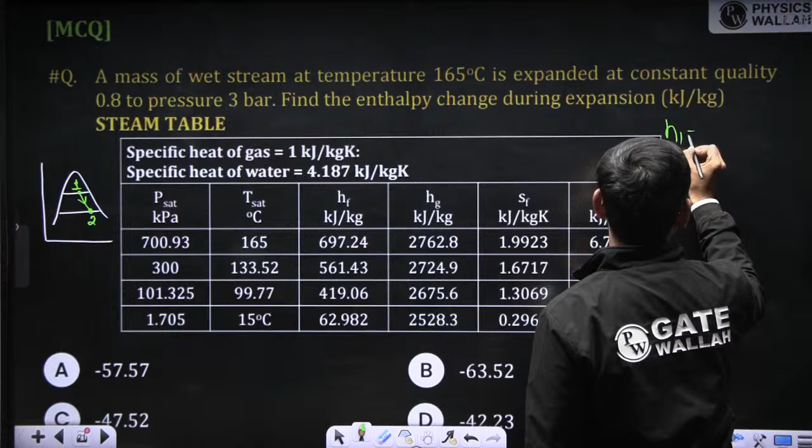Two points, same x value, okay? So first calculate H1 value. H1 is equal to, this 1 point data is which one? 165, so this is 1 point data, 165 degrees centigrade. This is 1 point data, this is 2 point data. These other data are waste, not required, only to confuse you.

So H1 value will come HF at 165. So 697.24 plus 0.8 times of Hg minus Hf, that is 2762.8 minus 697.24.

Then calculate H2 value. H2 value, how much you will get? H2 value you will get: 561.43 plus 0.8 times of 2724.9 minus 561.43. Calculate H2 minus H1.

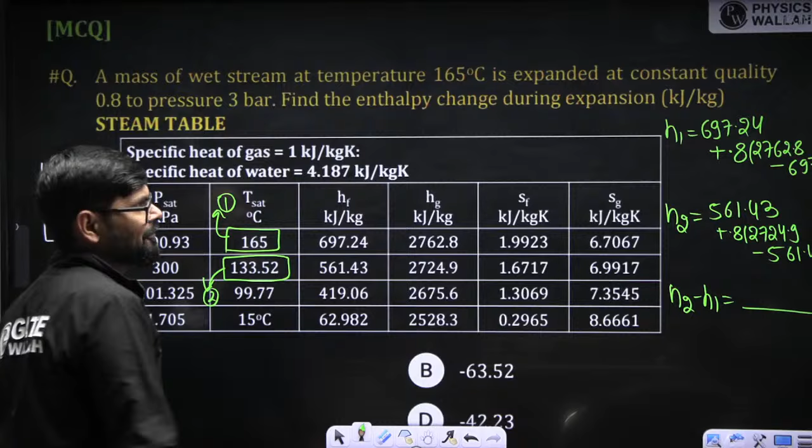Okay, A answer is coming up. Okay, so this value will come minus 57 point, how much? 57. We check. So A is going to be your correct answer. A is going to be your correct answer.

Okay, solve this particular problem. Everyone.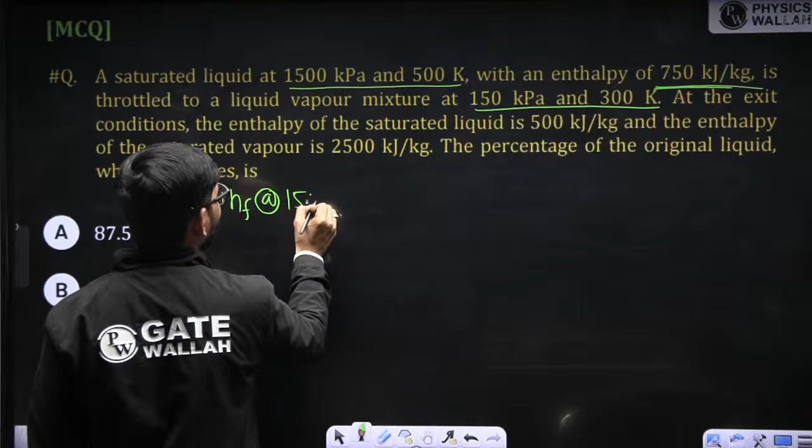So actually H1 is equal to what? H1 is equal to HF at 1500 kilopascal and 500 Kelvin. So this value will be 750 kilojoule per kg. This is given, the H1 value. Now this is going to be throttled and enthalpy of saturated liquid. This is HF value at this condition. This is the enthalpy of saturated vapor. Okay, this one, original liquid which is vaporized.

Now do one thing, for throttling process. H1 is equal to basically H2. So H1 is equal to 750 and H2 is equal to HF plus X times of Hg minus HF.

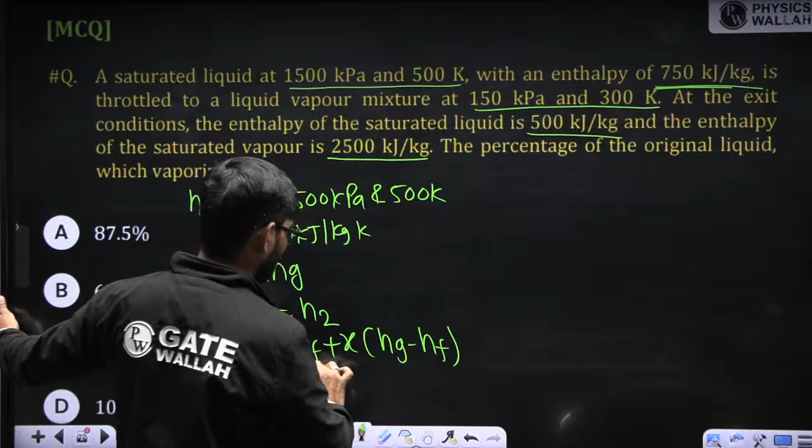Now the problem is solved. Now these values you have to take at 150 kilopascal and 300 Kelvin. So just put the values.

Just put the values. Here you will get 750 is equal to HF. HF value is how much, beta? HF value is 500. 500 plus X times of 2500 minus 500.

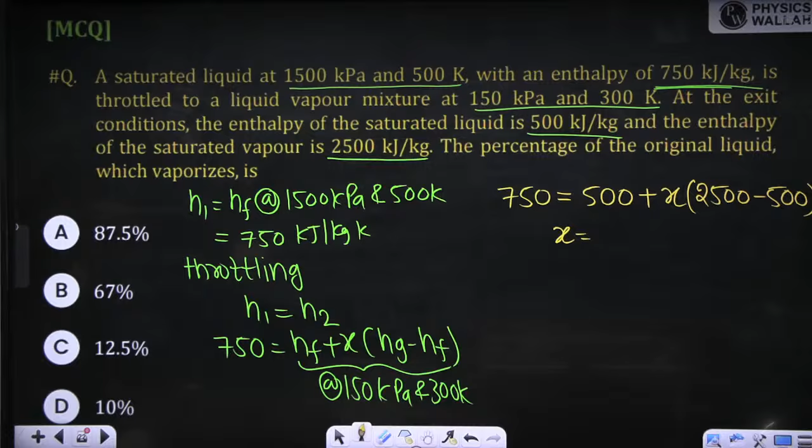Right, it's very easy. Throttling process is there. This line is very much about throttling. See, now if I draw here, let's say HS diagram. Let's say I'm going to draw here HS diagram, right? So complete HS diagram I'm going to draw. So it is something like this HS diagram, right?

So initially it is given that initially the liquid is at 1500 kilopascal. So let's say I'm going to draw here. This is 1500 kilopascal line. Okay, and initially it is somewhere here. The first point is somewhere here at point one. This is the saturated liquid line. This is the saturated vapor line.

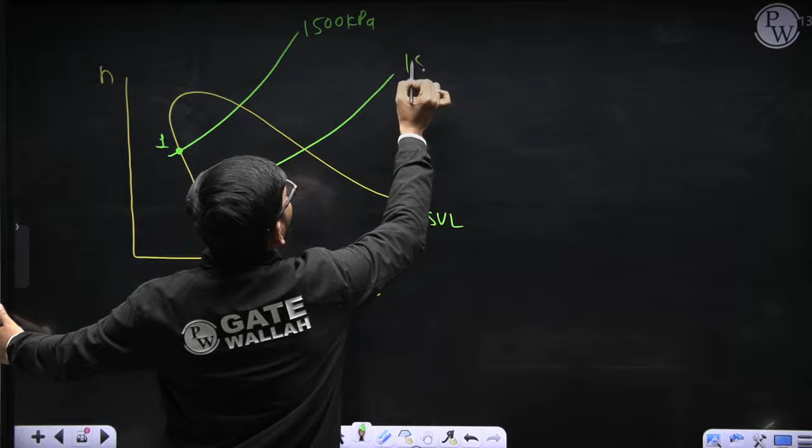Right? Now then we are throttling it to 150 kilopascal. So now what am I going to do? Throttling means this is a throttling process, right? Okay, actually this point 2 can be anywhere. Okay, so this is point 2, for example.

So here H1 is equal to H2. I put here H1 is equal to H2. So when I put H1 is equal to H2, 750 minus 500, 250 divided by this one, so this value will come to 0.125. What is this? This is nothing but the mass of vapor to the total mass. X is the mass fraction, so this is what they are asking. So if you write this in percentage, it will be 12.5%.

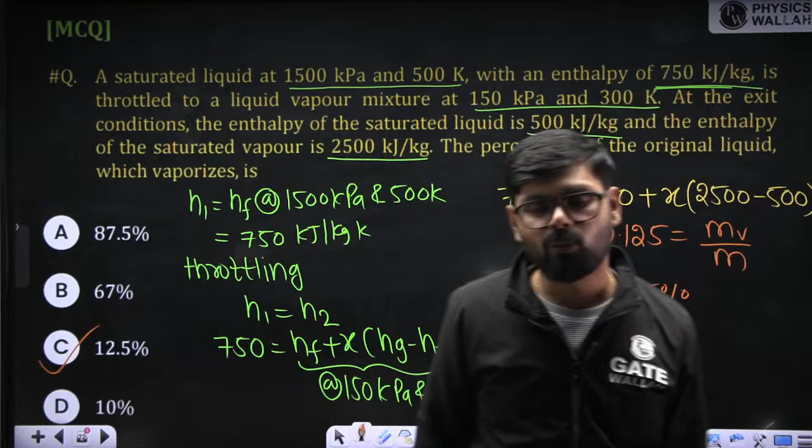They are asking how much, what is the mass of vapor that is converting. So here when throttling takes place, here we have liquid. After throttling, liquid plus vapor is there. So they are asking how much percentage of liquid is going to convert into vapor. So that is 12.5.

Clear hai? Okay, next question. Choose the correct answer. Joule-Kelvin coefficient is 0 for ideal gas. Yes, 100% correct. In Joule-Kelvin expansion, cooling is achieved when initial temperature must be below the... yes, initial temperature must be below the maximum inversion temperature, right? That I explained, right? So if I draw the diagram...

TP diagram, right? So then it will come something like this. This is a maximum inversion curve. If your temperature is somewhere here, so it will always go heating only, it will always heat only. So if you want cooling, then the actual temperature must be less than the maximum inversion temperature. So this is also correct. So 1 and 2 both are correct. A is the correct answer here.

So this we have already discussed. Not 2, 1 or 2 both are correct. Sorry, Joule-Thomson... okay.

Now, according to Maxwell, which of the following are correct? Very easy, so you just draw here.

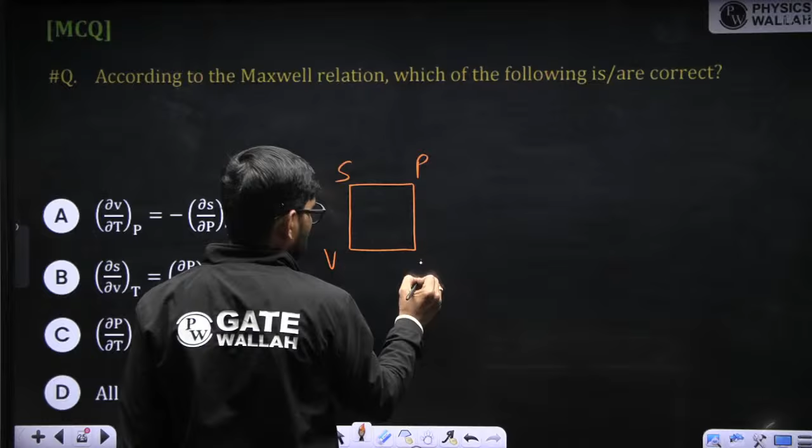Okay, this come. So here dou S by dou V, dou S by dou V, SVT minus, then PTV minus, so minus, this is also correct. PTV minus, so S, okay, this is also, so all are correct basically. These are all 4 equations I have given to you. Then Maxwell's relation, so as per the Maxwell, all 4 equations are going to be correct.

Clear? Last problem, I think last problem only, na? Yes, last problem, solve the last problem.

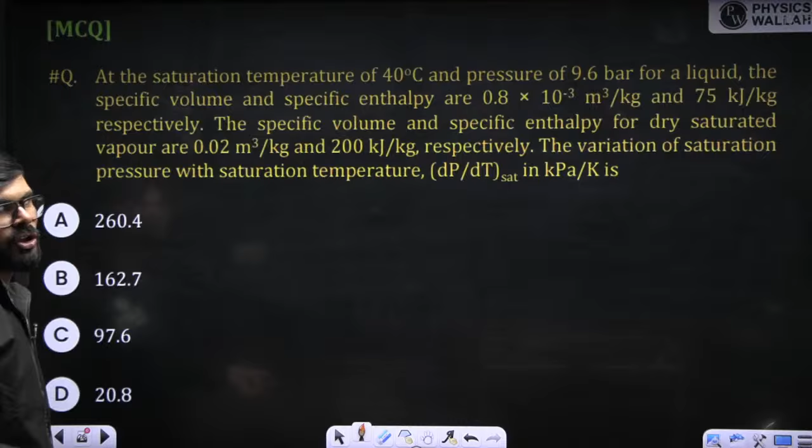So here we have to use Clapeyron equation. B and C same. Oh yeah, B and C is same. Okay, then also all of above is only correct.

Now Clapeyron equation, we have already seen that the latent heat means Hg minus Hf by T saturation is equal to dP by dt saturation, Vg minus Vf. So with the help of this formula you can solve.

Sir, heating replace the cooling, then what will happen? Then no problem. If the actual temperature or initial temperature is above the maximum inversion temperature, then right.

Sir, how to check the sign? Sign you forget, okay, sign. I told you, if curve goes like this downward, then this is negative curve, right? Minus you have to take. If the curve is like this, then we have to take positive.

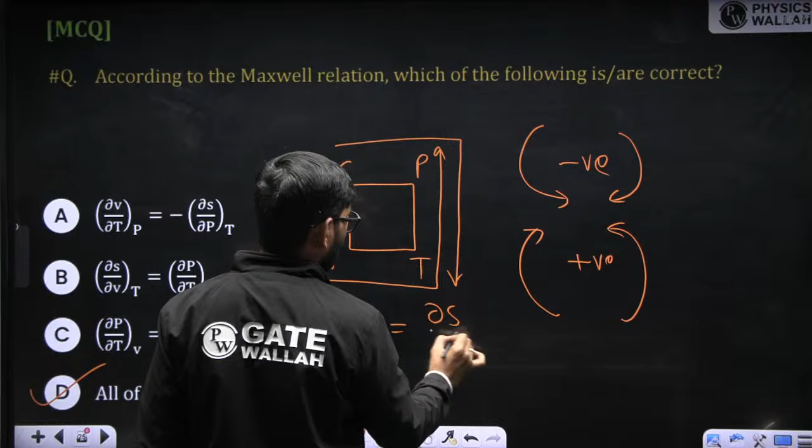For example, if I take this one, so VTP will come like this and SPT will come like this. So this is downward, this is upward. So this value will be positive. So dou V by dou T at constant pressure, that is positive, and dou S by dou P at constant temperature is going to be negative. So one I wrote, similarly you can write other one also.

Solve this. Everyone solve this. So what are they asking?

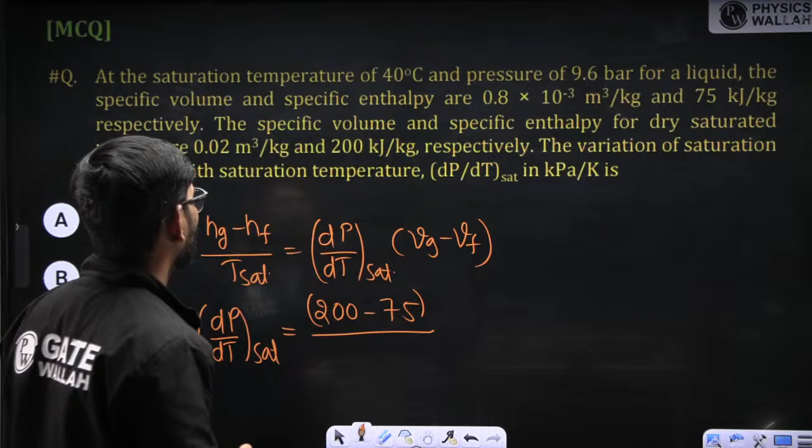dP by dt. So now if you calculate dP by dt saturation is equal to, now what is Hg? The saturation temperature 40 degrees centigrade and 9.6 bar liquid, the specific volume and specific enthalpy. Specific volume, specific enthalpy is 75. The specific volume is dry saturated, so this value is 200. So 200 minus 75, 200 by 75 divided by T saturation. What is T saturation? 40 degrees centigrade, so 273 plus 40.

So 273 plus 40, this value will come 313 into Vg. Vg value is how much? Vg value is dry saturated, 0.02 minus 0.0008, this only, na? So 200... this value will come 20.8, right? Kilopascal per Kelvin.

So D is going to be correct answer. Now everyone please listen here carefully.

So here we solved 20 behtareen problems, right? We solved 20 behtareen problems where we consider Clausius-Clapeyron one. There are number of problems based on properties of pure substance. There are number of problems on first law also. Like almost every type of problem is covered, right? Not every, but 60-70% concepts are going to be over, right?